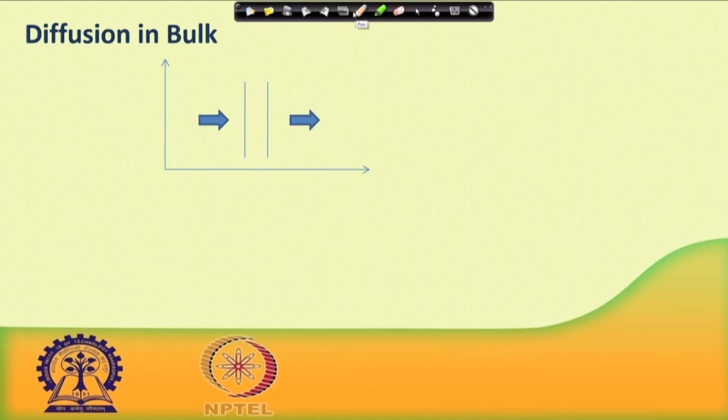For example, diffusion. We said that molecules, because of their own Brownian motion, will travel from higher concentration to lower concentration, and that can lead to some kind of movement of molecules from one end of the porous medium to the other. In the last class we discussed the essentials of this diffusion process. So when it comes to diffusion, the movement of molecules can take place from higher concentration to lower concentration.

This can be theorized using so-called Fick's first law and Fick's second law. What we found is the flux is equal to minus D del c del x, if x is in this direction and c is the concentration. Also in the last class we considered accumulation in the differential element, how much is the change in concentration happening because of flow in minus flow out, and from there one can arrive at Fick's second law, which is given by this equation.

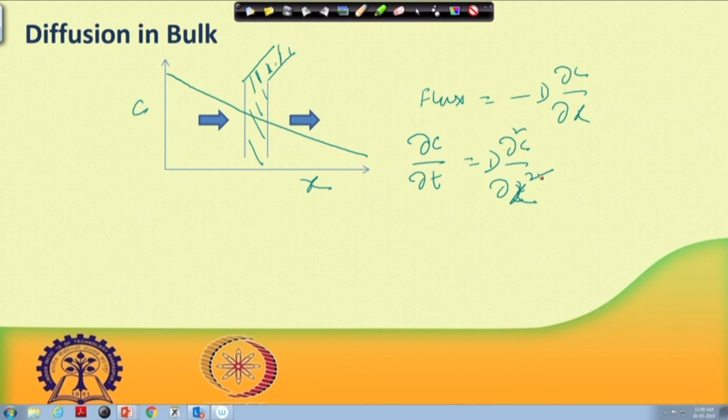These are the things we had studied in the last class. What we are going to do next is apply this to surface diffusion. There could be various transport mechanisms by which the movement can take place: bulk diffusion, Knudsen diffusion, surface diffusion, and of course viscous flow, which follows Darcy's law. We have talked about bulk diffusion, and we said Fick's first and second laws are applicable for bulk diffusion. The pore wall does not come into play there; the molecules simply move because of a concentration gradient.

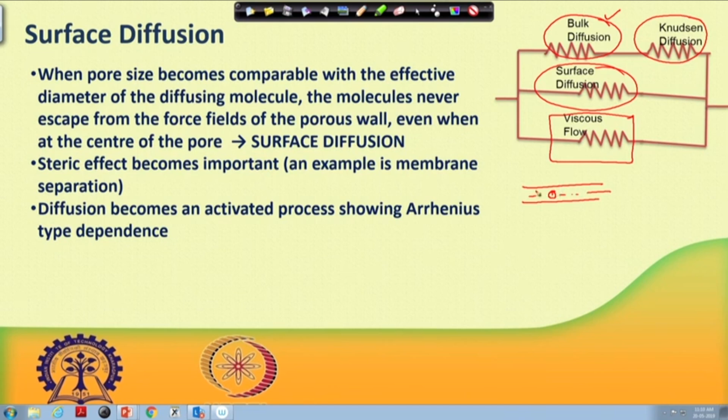Now when pore size becomes comparable with the effective diameter of the diffusing molecule, if the pore size is this much and the molecule is this much, though the molecule is at the center line of the pore, it is still under the influence of the wall. So the diffusion through this pore is not necessarily bulk diffusion; the wall effect comes into play. When pore size becomes comparable with the effective diameter of the diffusing molecule, the molecules never escape from the force fields of the porous wall even when at the center of the pore. This is referred to as surface diffusion.

A couple of things one needs to remember: surface diffusion is slightly different from bulk diffusion, because in bulk diffusion molecules are free to move, with their own intrinsic diffusivity controlling the movement. Here the steric effect becomes important. Second, diffusion becomes an activated process showing Arrhenius type dependence, which we have seen for the reaction rate constant's dependence on temperature. So surface diffusion differs from bulk diffusion in that it becomes an activated process.

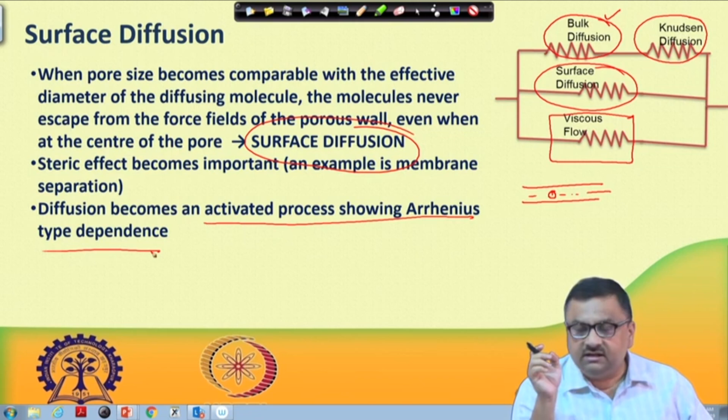Now if we want to put some theory behind surface diffusion, it will always be occurring alongside bulk diffusion. Some diffusion happens through the center of the pore and some under the influence of the pore wall. So total flux is given by Jp plus Js, one is pore and another is surface diffusion. Here we have given two diffusivities, one is surface diffusivity, another is D naught into tau. This is the diffusivity.

See, tau is the factor to account for tortuosity, because in case of bulk diffusion the molecule is free to move. Okay, inside a pore when it travels, suppose I think of a porous medium through which this molecule is traveling as against the same cross-sectional area pipe through which the molecule is traveling. So inside a porous medium, this molecule has to travel through a zigzag path, because some parts are already blocked, so it has to find some other pathway.

So naturally the length through which this molecule has to travel becomes higher, and how much higher? Tortuosity is the factor that gives you an idea how much the pathway would be increased, whereas if it is through a pipe without any porous medium, without any solid present there, the molecule can travel on its own. So here it is forced to move through a tortuous pathway inside a porous medium. So one has to account for this by multiplying the bulk diffusion with a factor, which is the tortuosity factor.

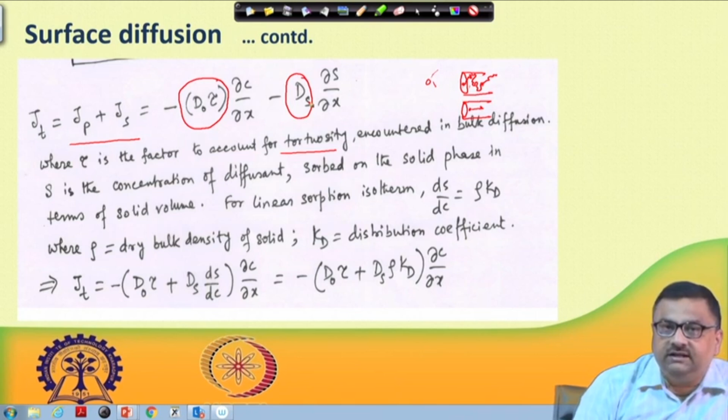So the tortuosity factor would be less than 1, and so the diffusion coefficient would be reduced because it is taking a tortuous path. So this is the so-called bulk diffusion through the pore network, and the second one is surface diffusion. Surface diffusion is assigned some diffusivity, let us call it Ds, D subscript s. Here we were writing del C del x, the concentration gradient, but here we are not writing C, we are writing S.

S is the concentration of diffusant sorbed on the solid phase in terms of solid volume. So what was concentration? Concentration is so much mass present in the bulk divided by the volume. But here it is the concentration of diffusant sorbed on the solid phase. So the diffusion that is taking place by this mechanism is known as surface diffusion.

So if this is the pathway, molecules are getting sorbed here on the surface and diffusing. So what we need to know is the concentration of these sorbed molecules in terms of solid volume. Concentration means some weight divided by volume. So in this case, S is the concentration of diffusant sorbed on the solid surface divided by the solid volume in which it is sorbed. So you can see this definition of S. S is different from C. C is bulk concentration.

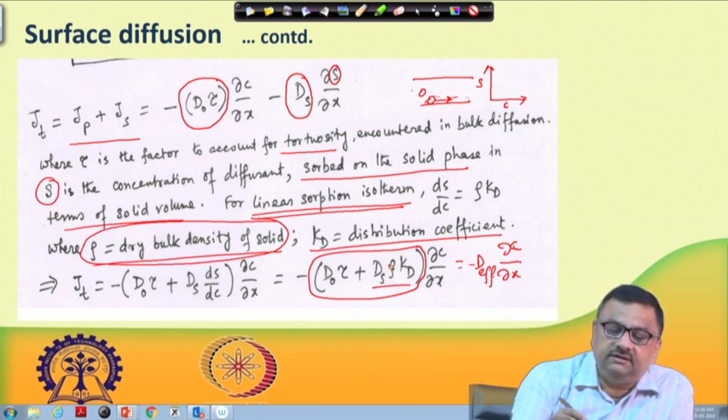So now with this background, we are looking at another combination. Suppose I have a situation where surface diffusion is not important, and we have two types of flows happening simultaneously in a porous medium. This is a situation when the characteristic dimension of the pore is small with reference to the mean free path lambda of the molecule. It will happen when you are working with a smaller pore size porous medium, and the fluid flowing is likely to be gas, where lambda is more.

So generally when lambda, the mean free path, and d, the diameter of the pore, are comparable, we have to consider the Knudsen flow. In fact lambda by d is called the Knudsen number, and there are some threshold numbers available when one has to consider this Knudsen diffusion.

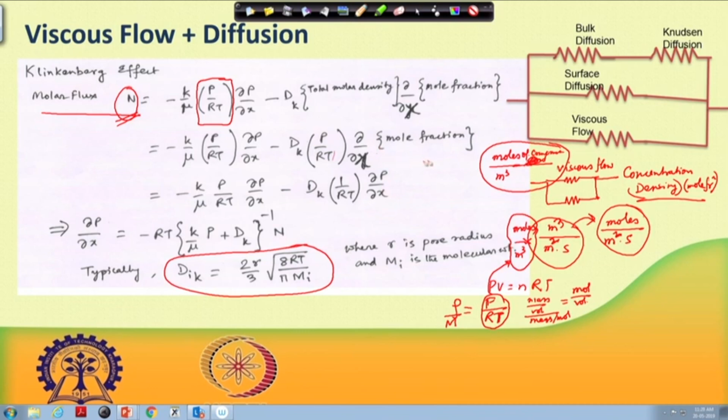So, in this case, now if this pressure goes inside, you leave this 1 by RT as it is outside, and P when it is multiplied by mole fraction gives the corresponding partial pressure of that particular component. So, P into mole fraction gives me the partial pressure. So, this is now the del P del x in this case. So, minus D by RT del x of this.

So, this becomes the governing equation for the molar flux. Okay, this is how the N is defined. So, in this case, now one can take these del P del x outside, and then, if you take del P del x out, this thing becomes N divided by this whole thing, right. So, del P del x you are taking common, and leaving this del P del x on one side, the other side will have N divided by this. So, you can break it up and write it in terms of this expression.

Now, the Darcy velocity is written as N in moles divided by P by RT in moles per meter cube. We already have N in moles per meter square second. So, molar flux divided by molar density gives me the superficial velocity. This we already discussed. So, in that case, instead of N, the expression we had just now for N here,

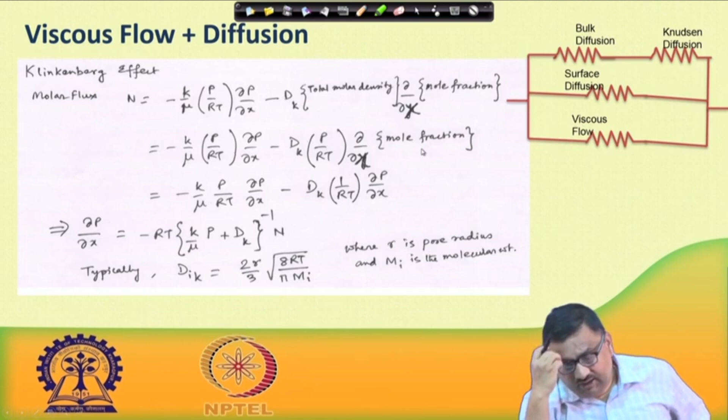Let me quickly revisit what we have done here. We have assumed viscous flow and Knudsen diffusion, and we have considered them in parallel. We have taken the total molar flux as the sum of the Poiseuille's flux arising from Poiseuille's flow and the flux arising because of Knudsen diffusion. Knudsen diffusion depends on the Knudsen diffusivity, which is given by this term, and there has to be a gradient, and at the end of the day what we put as gradient is 1 by RT del P del X. So, here also we have a gradient, here also we have a gradient.

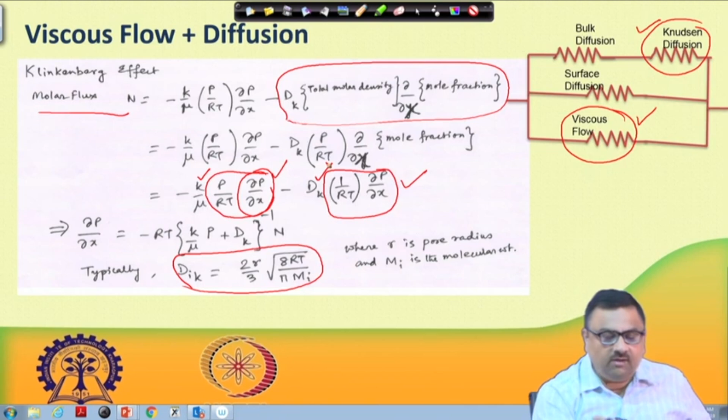Because the molecules have a concentration, and on this side you have higher pressure, that side lower pressure, automatically there would be a concentration gradient of molecules, and that is driving the flow. So, you have these two gradients present here. Outside you have the K by mu term, and here you have the Knudsen diffusivity term. So, by combining these two fluxes we get this final form known as the Klinkenberg equation, and this leads to a nonlinear permeability. This type of flow becomes important, for example, in reservoir flow when one is working with shale and with gas flow. Then one needs to consider permeability which depends on pressure. So, this is the origin of the Klinkenberg equation.

I am going to stop here as far as this particular lecture is concerned. I will continue working further on other transport mechanisms that could be important in this context in the next session.